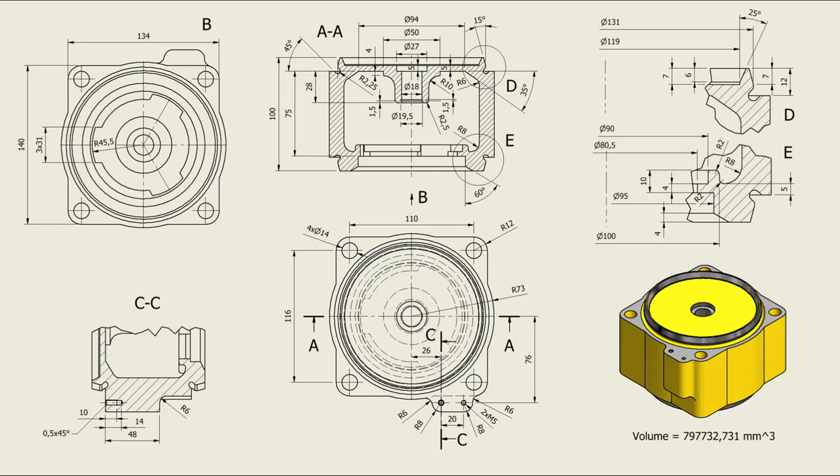Hi my friends, today we model this part, which is the pressure relay body.

The drawing is here with all dimensions. You see details D here, E here. I work hard to create these drawings, but how could I transfer information to you without drawings, my friends?

Let's start. The first sketch will be this pseudo-rectangular contour with dimensions 140, 134, a radius of 73 to this and this arcs, and the height of 75.

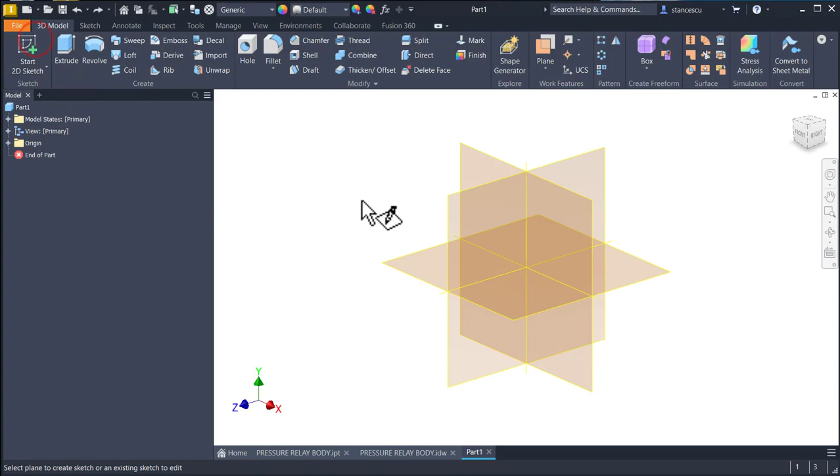Okay, new standard millimeters IPT. Start 2D sketch. This plane XZ to the right,

and we create that rectangle with dimensions 134 by 140.

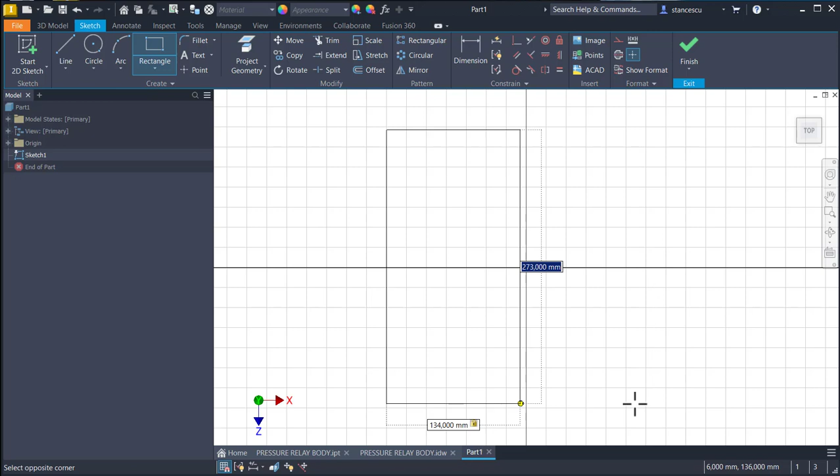We place it somewhere here, and we apply vertical, horizontal constraints,

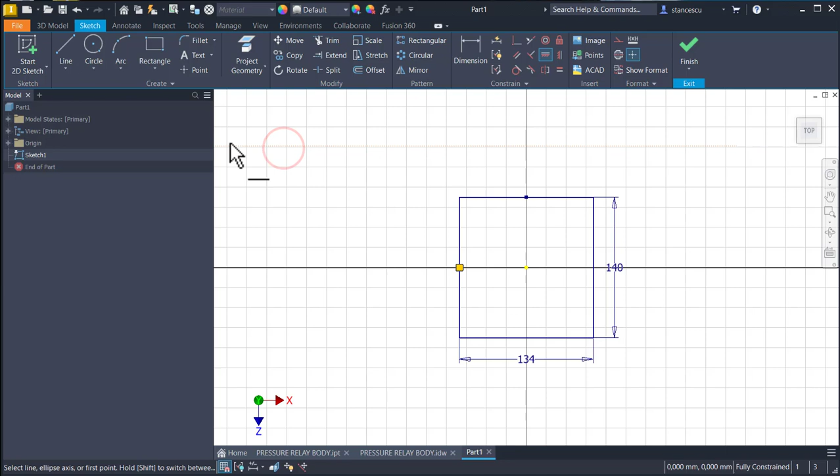then a circle with a radius, a circle with the center in the center point and with the radius of 73.

Now we have a combination of lines here, a lot, so that we trim each of that lines and arcs. You can use another procedure, of course.

These 2 points are not important now, and we have 10 dimensions needed. This is one alignment. This is also aligned, and aligned. Now we have 6 dimensions needed.

Then we create equal arcs, equal with the same radius, of course. And now we have only 3 dimensions needed.

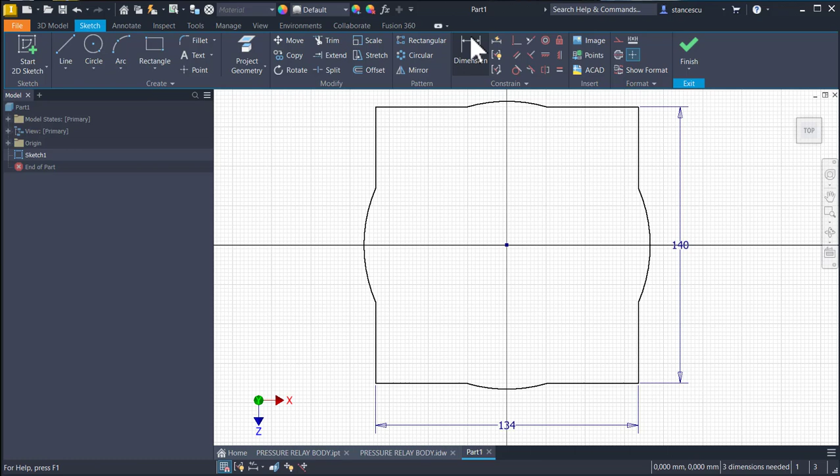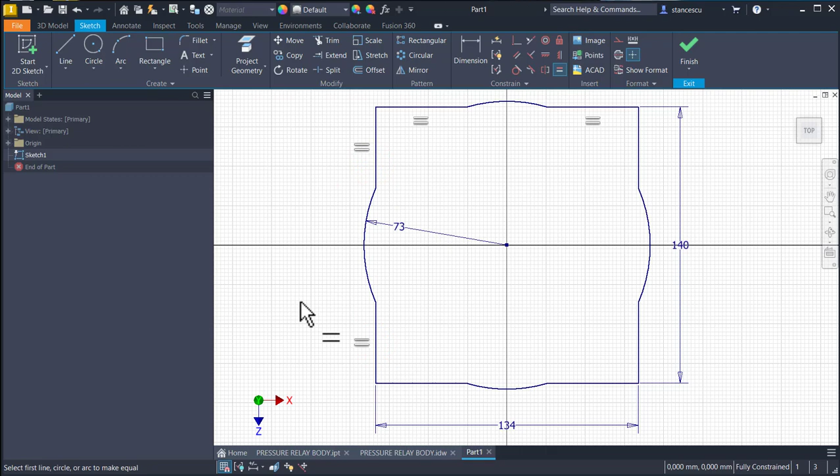This is 73, and we make equal this with this. This means we have a center on the horizontal, and this with this equal up. Fully constrained sketch, finish sketch,

and extrude. 75 symmetrical, 75.

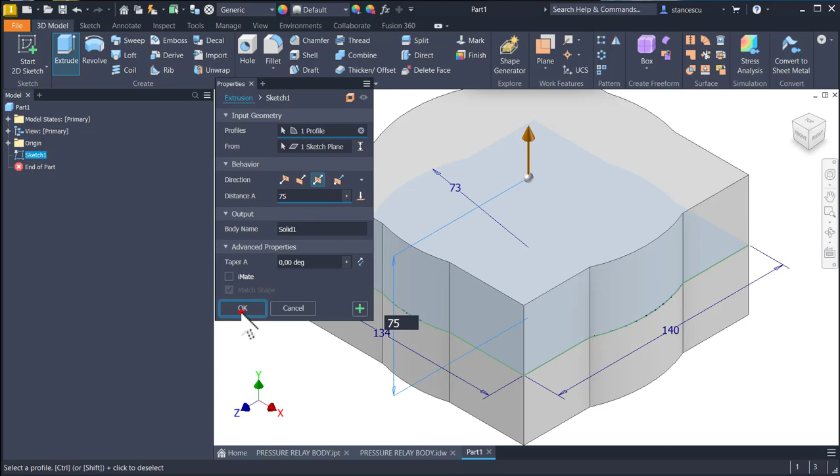Okay, now we take a look at the drawing and we see radius 12. This is a fillet of 12 and also the other corners.

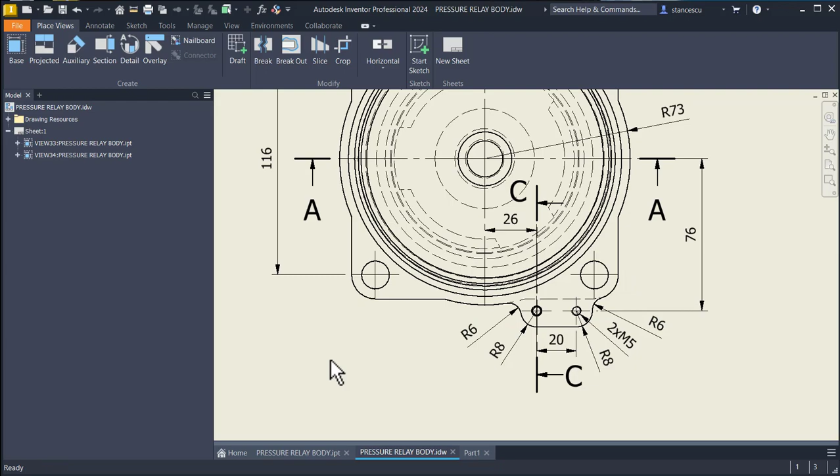Okay, then we create this extension with dimensions here 26, 20, 76 for these centers, radius 8 on the left and right, radius 6 at the connection with the previous pseudo-rectangular body. The depth or the length is 48.

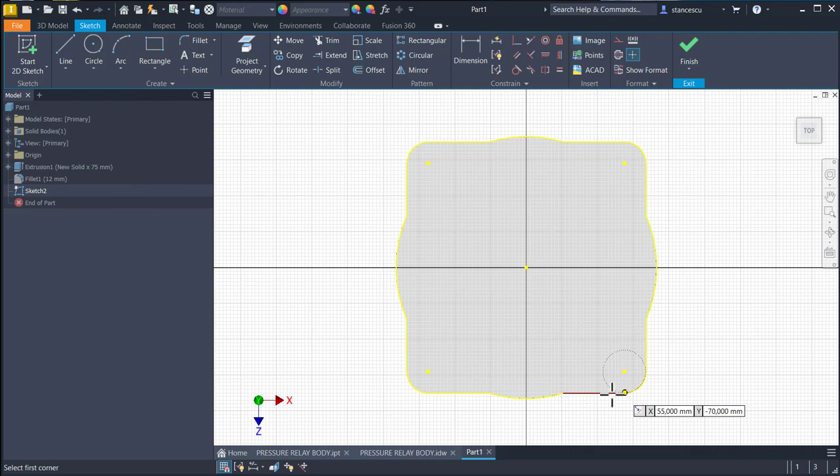We use this face. We create a rectangle based on this line, projected line.

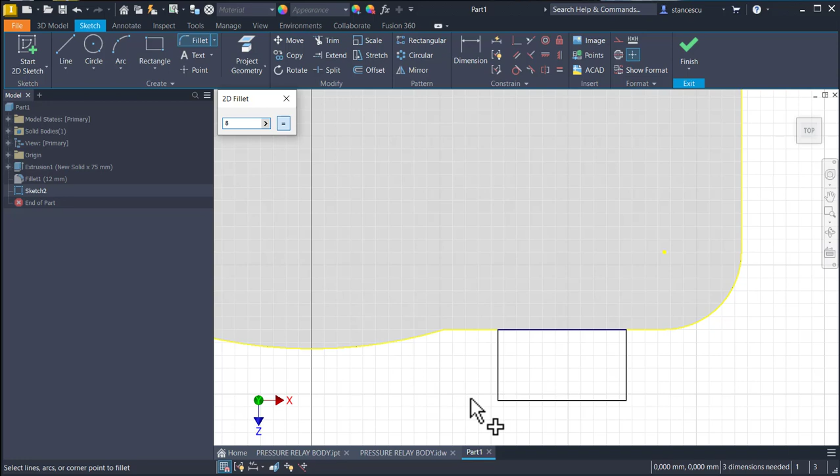We apply fillets of 8 to have centers, you see, 8. To this corner and this corner.

Then dimensions 26 and 20. 26 is this.

And 20 is between the centers or arcs. The other distance is from the center to the center point on vertical, 76.

Good. We have here a small corner. Let's project this arc. Project, and we apply split. Split and split. Why? Because I want to make this construction.

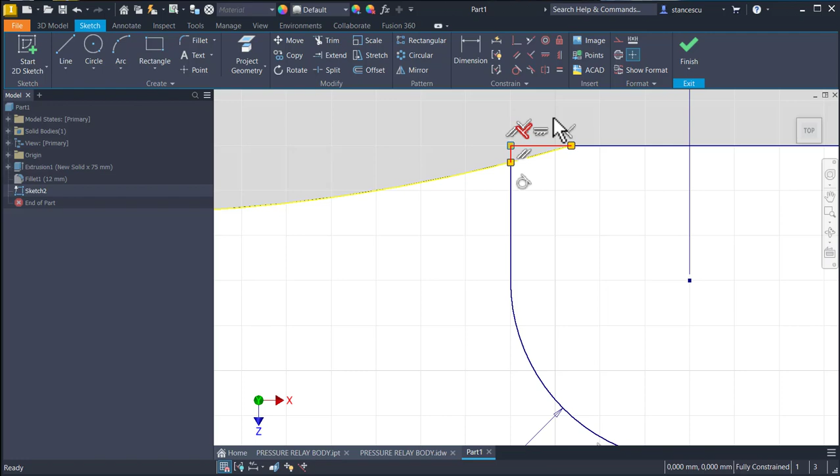Now finish sketch, because we have a fully constrained sketch, and extrude this close contour on this direction, and the depth or the height is 48.

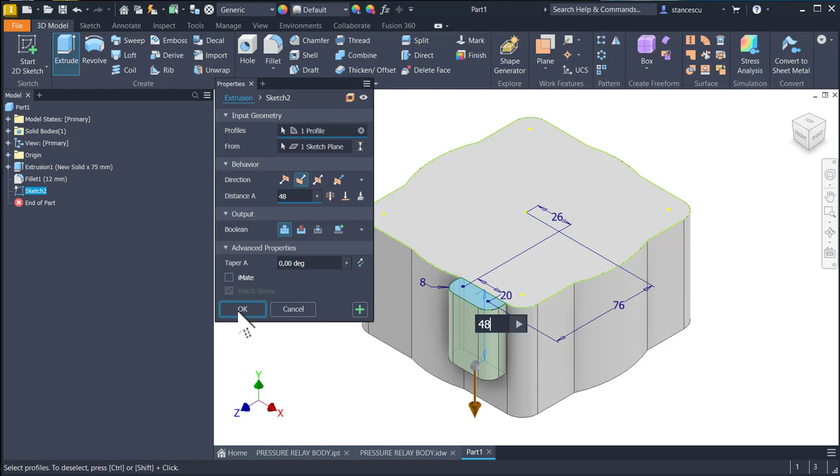Okay, then we see that there are fillets, this one and this two. Good.

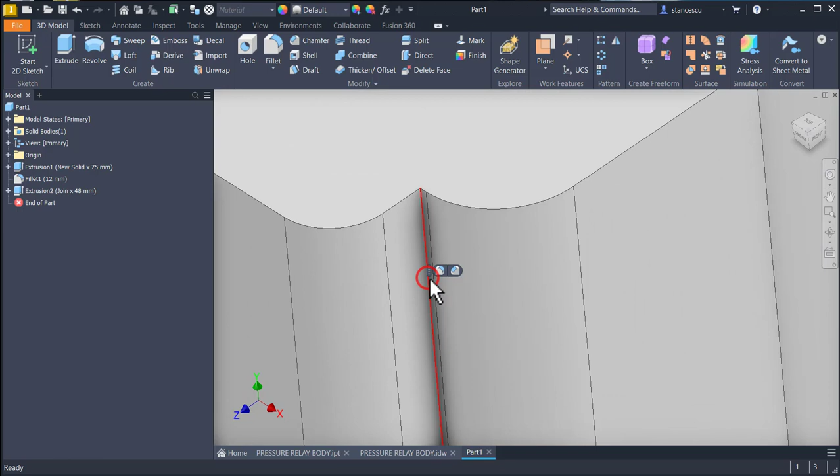We select this corner to apply radius 6, and also this corner with 6. Then another fillet to this bottom edge. Okay.

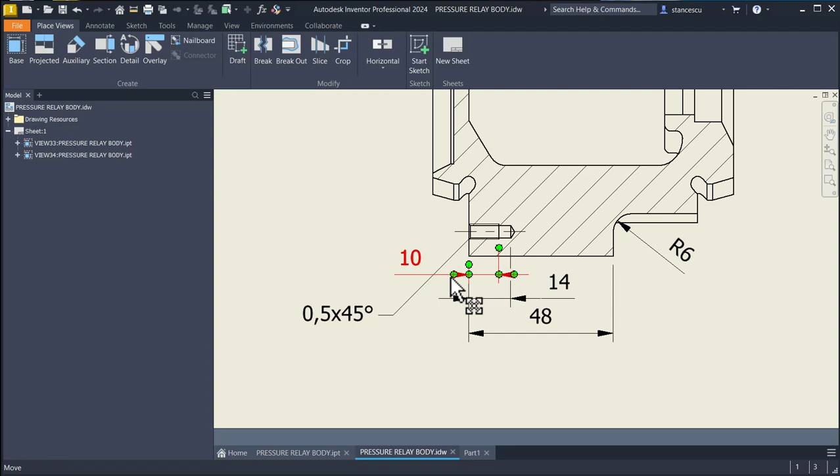To finish this feature, we take a look here and we see that there are two threaded holes with 10 millimeters for the thread, 14 for the depth, and metric 5.

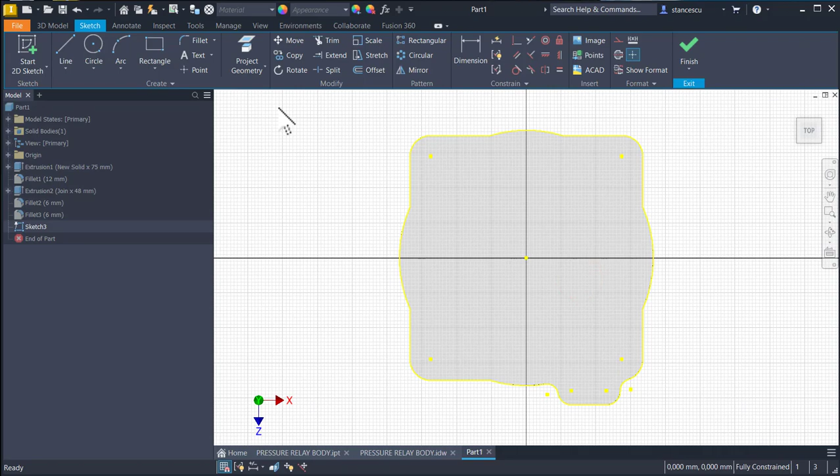Let's place these two small holes. Now we have centers and we apply hole. What kind of hole? They are placed here and there.

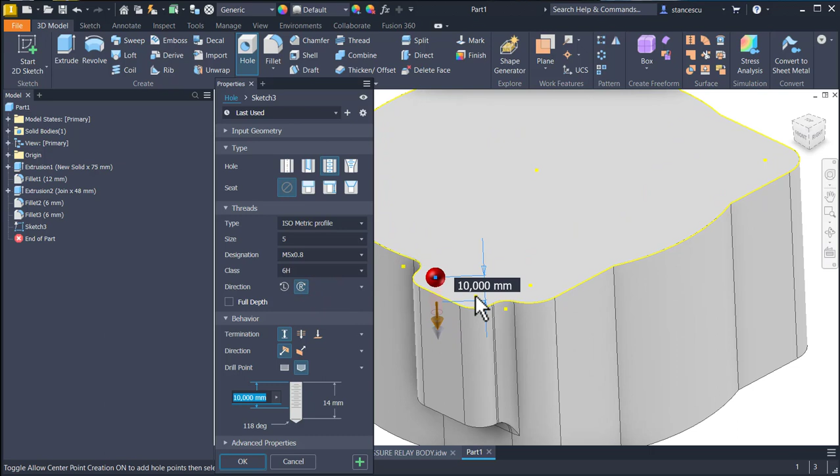Oh, they are already selected, but let me select also this point. Yes, 10, 14, metric 5, normal pitch, not full depth because there is a difference between them.

We also see here 0.5, 45 as a chamfer, edge, chamfer 0.5 to both. Okay.

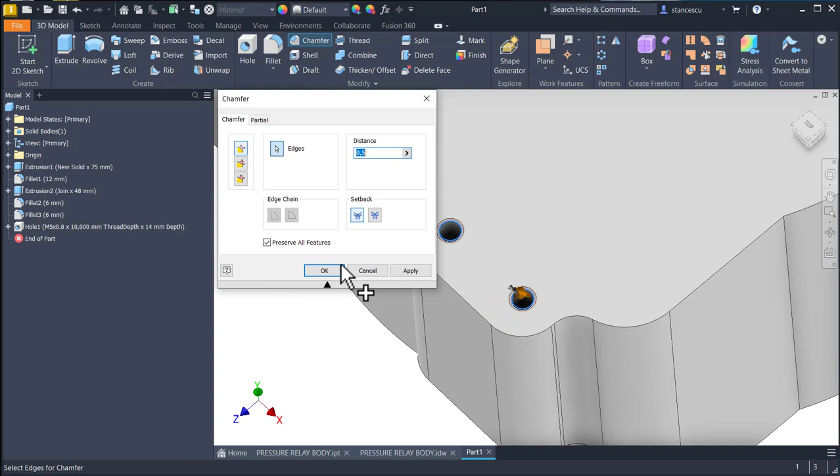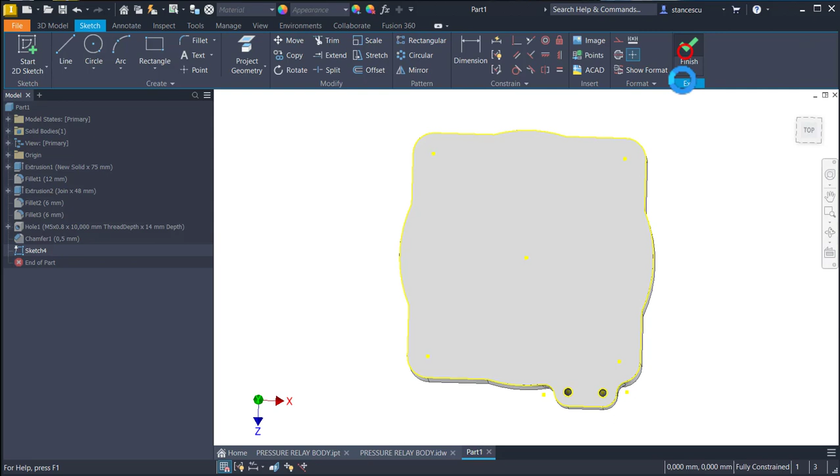Then also to finish with the small problems, we see 4 holes of 14. I create another sketch, go back and apply hole on this 4, 1, 2, 3, 4 points without thread through

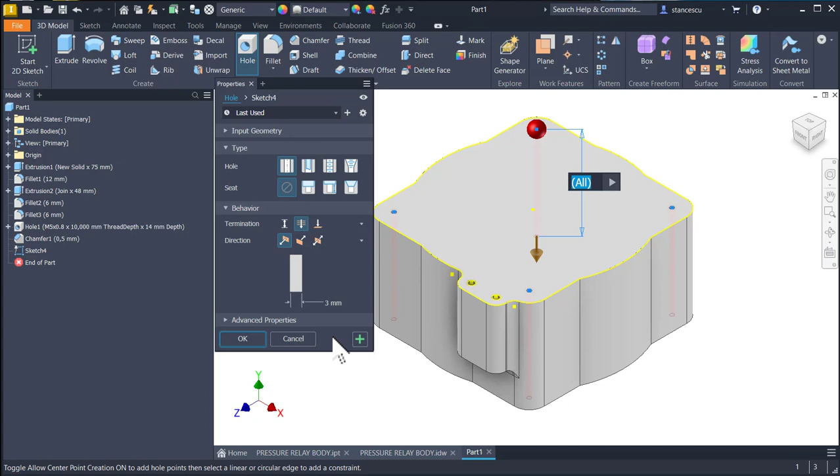Yes. Now we create this revolving feature with dimensions of 15 degrees, 12, 7, and diameter of 131. Only external, yes, without this cut, only external.

The plane is XY. F7, and we draw a line from this center to the right, up, back, and close.

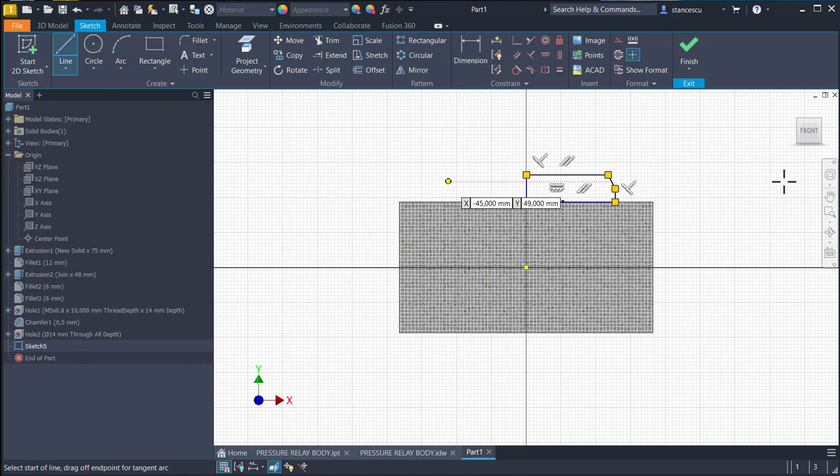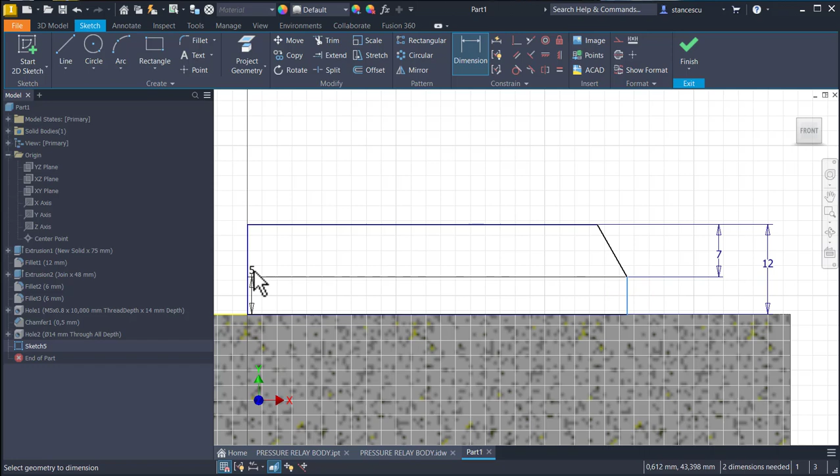Then dimensions 12, 7, 131, but let me change this to center line, and now 131, 131, and the angle of 15.

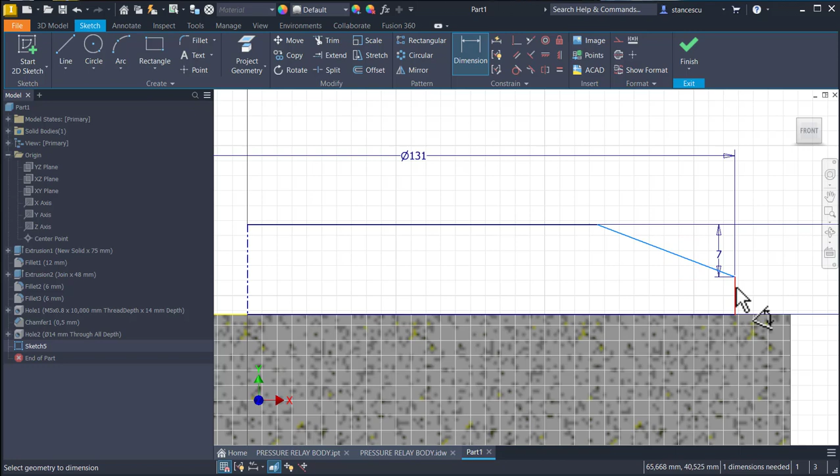Finish sketch. Revolve. Okay.

Now if you take a look to this external, they are the same. If we have no dimensions here, this is what we understand. The external shape from here is the same with this.

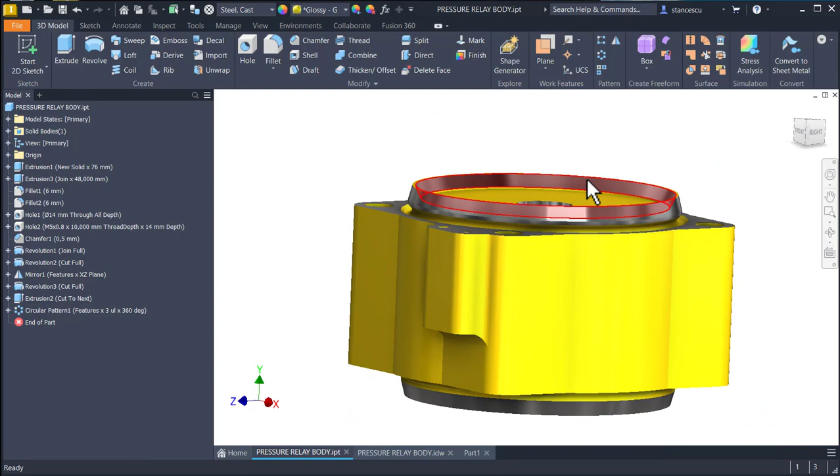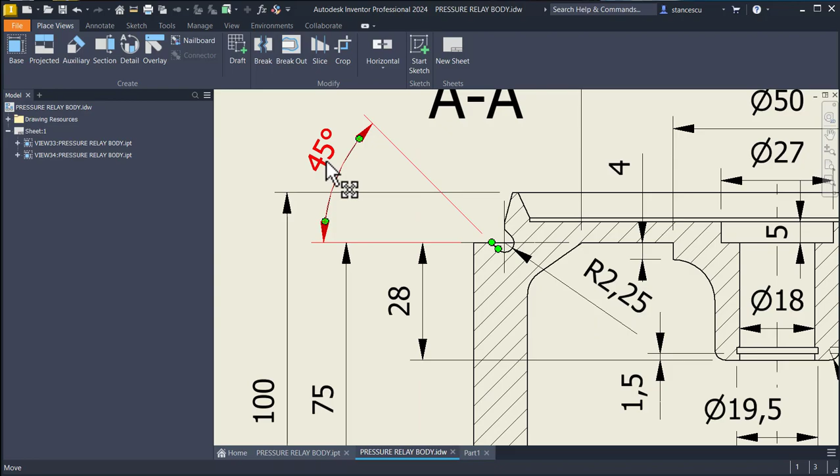I'll create this cut firstly, then I mirror this external feature. What about that cut? The center of this radius is in this point, and the value is 2.25 and 45 degrees.

Again, XY plane, F7, I project 1, 2 lines. They are construction lines.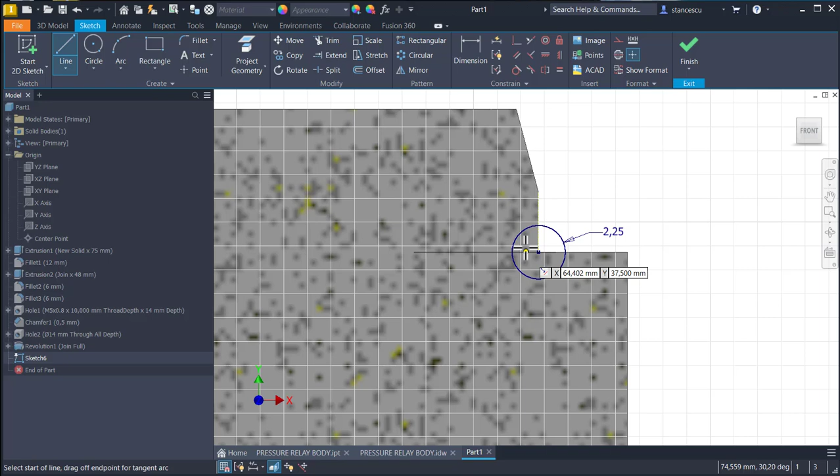Circle with the radius 2.25. Then 2 tangents. Keep pressed the left button somewhere on the circumference and go to somewhere.

It is tangent. Restart. Keep pressed the button and see that we can draw now a parallel because Inventor knows what I did. You see? Parallel with the other one.

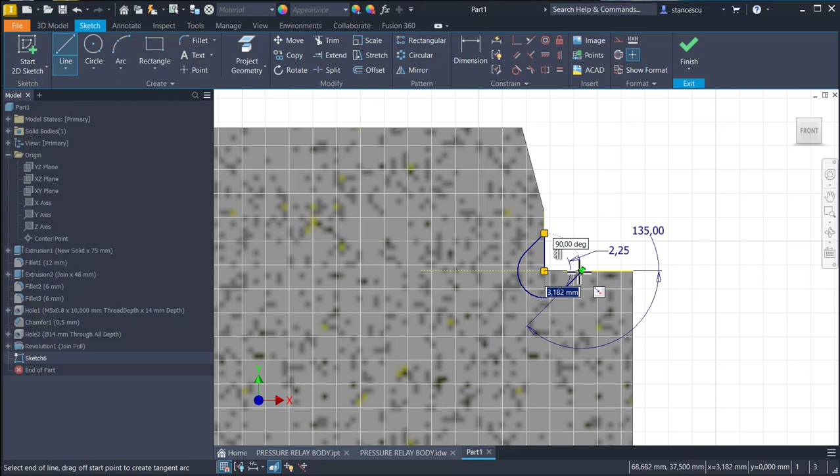45 is the angle here, and now trim this end line, trim this and these 2 arcs. I draw 2 lines, 1 and 2 to have a close contour.

Finish sketch, revolve. This is already selected, and now the axis, which is Y. The axis Y. Cut, not join.

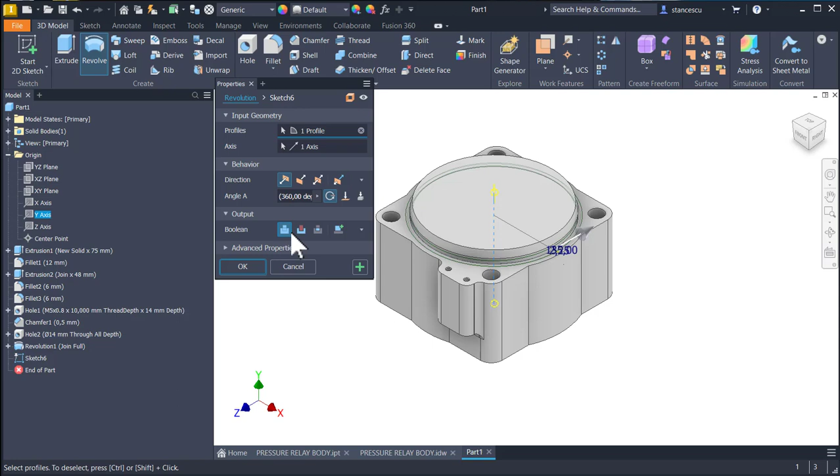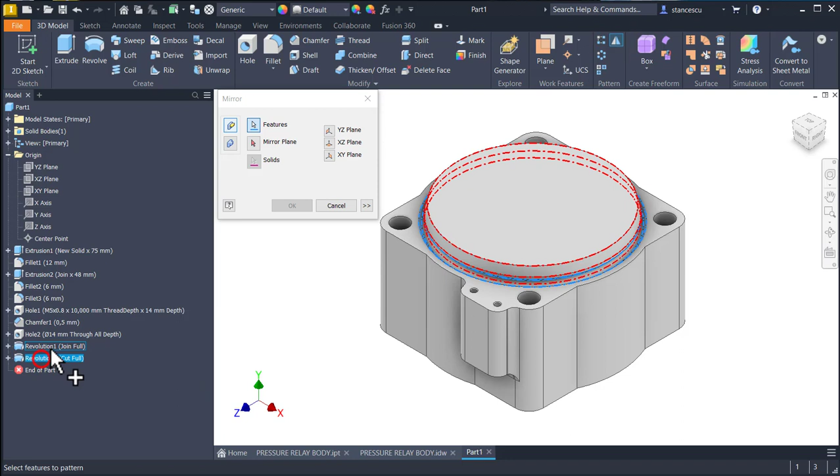You see, this is the new feature. Now, as I said, I apply mirror of 1, 2 features about this midplane. Okay, we have the same picture on the bottom.

Next is the internal volume, which has dimensions from here. Look at my trajectory. Yes, here. All of this is hollow.

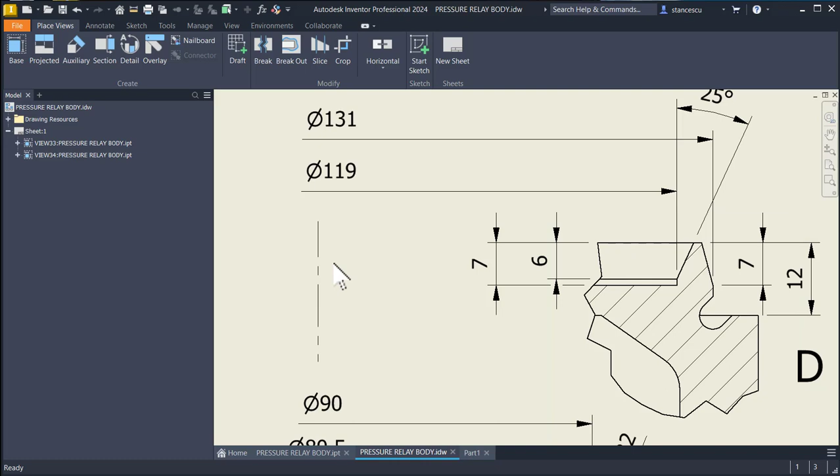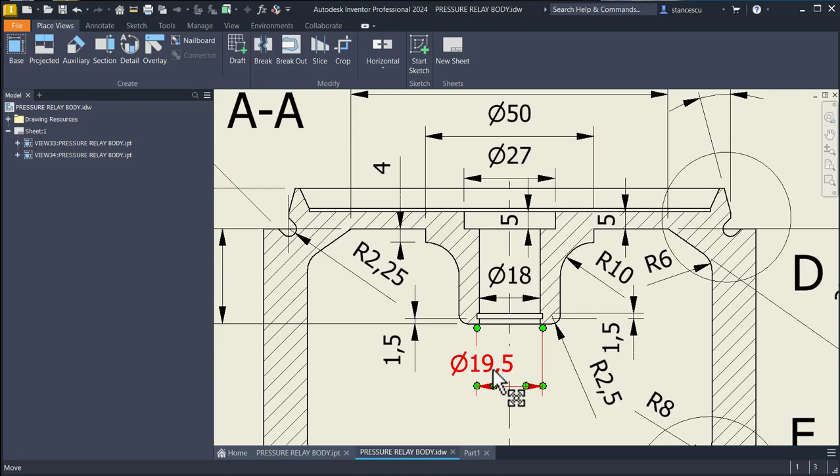Good. And where are dimensions? Dimensions are also on these 2 details. 119, 6 is this, 7 like outside is all the depths, and then here another revolving contour, 5 with 27, 18. This is a small cut of 1.5 distance and width, diameter of 19.5,

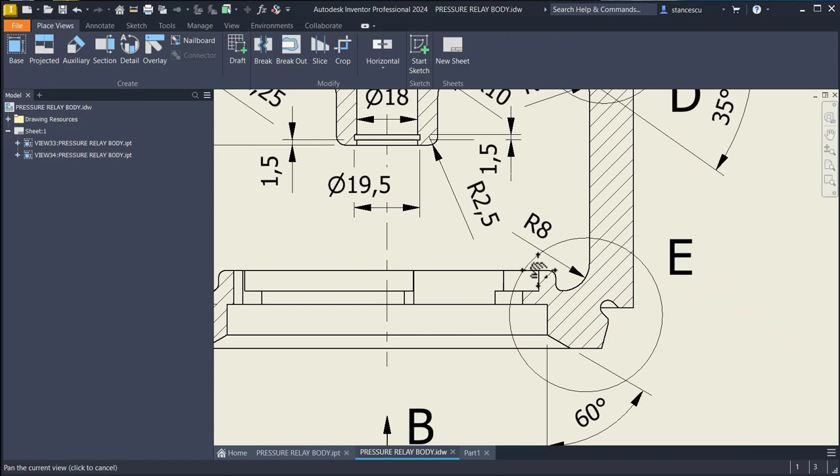radius 10, this is 2.5, then 4 millimeters, then a diameter of 94, an angle of 35 degrees, radius 6, radius 8. We go to the detail and we have radius 8, radius 2, radius 2, 90, and the other dimensions you have here all the data, and 60 degrees here.

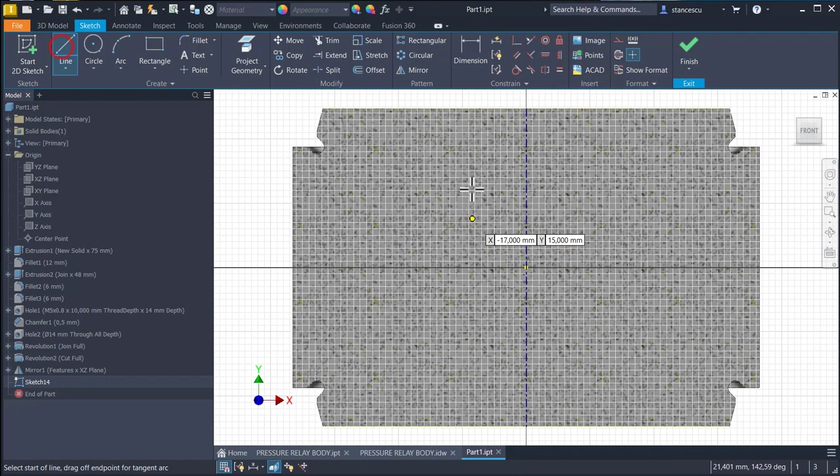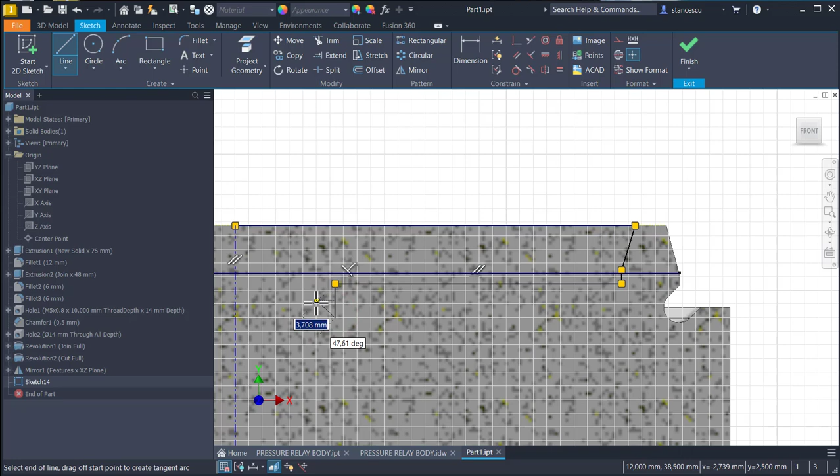Okay, XY plane, sketch, F7, home, project this line and this line, connect their centers with a center line, make these two as construction and the axis as center line. Then we draw lines. The first is this one, then another one sloped to somewhere here, then vertical, then to the left, down, left again, down here to the right.

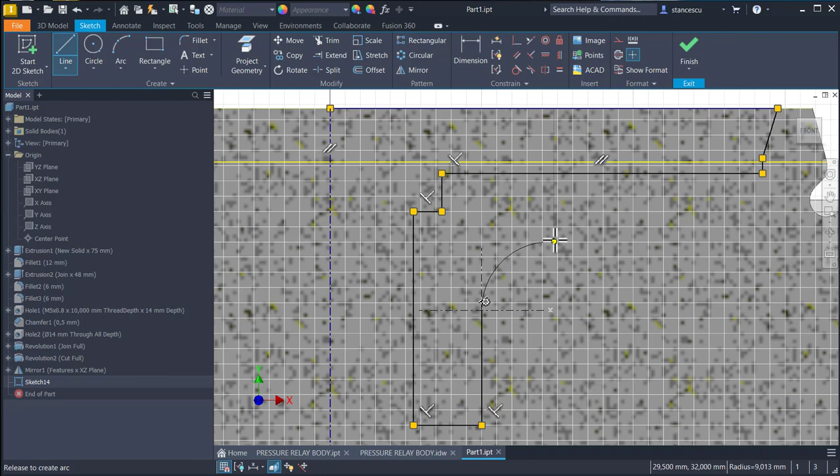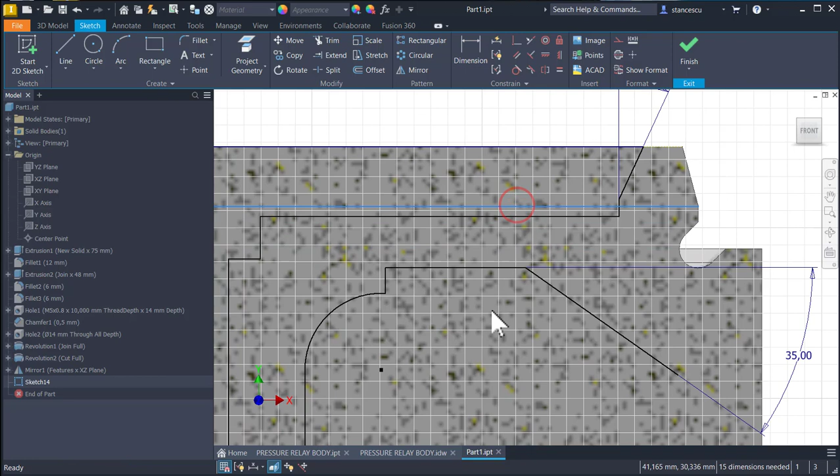I keep pressed the left button and I draw an arc up, right, and somewhere here. We start with angles. This is 25. This was not vertical, we make it vertical. Good. Then the other angle is 35. I erase this line, we don't need it, and we place dimensions. This is radius 10.

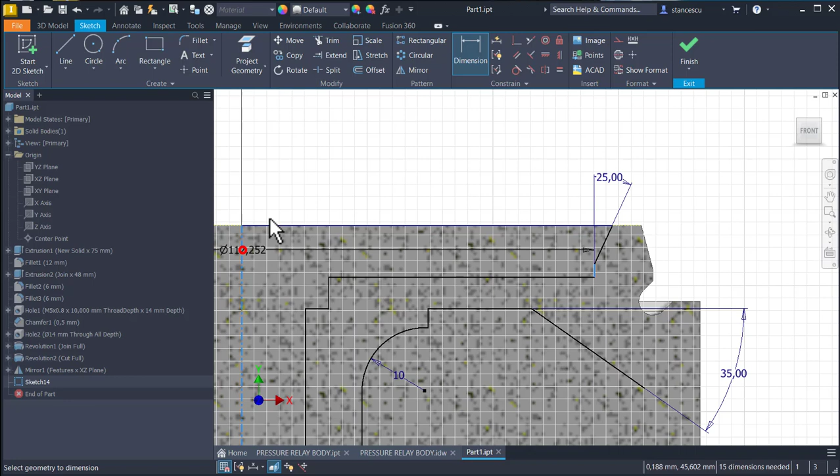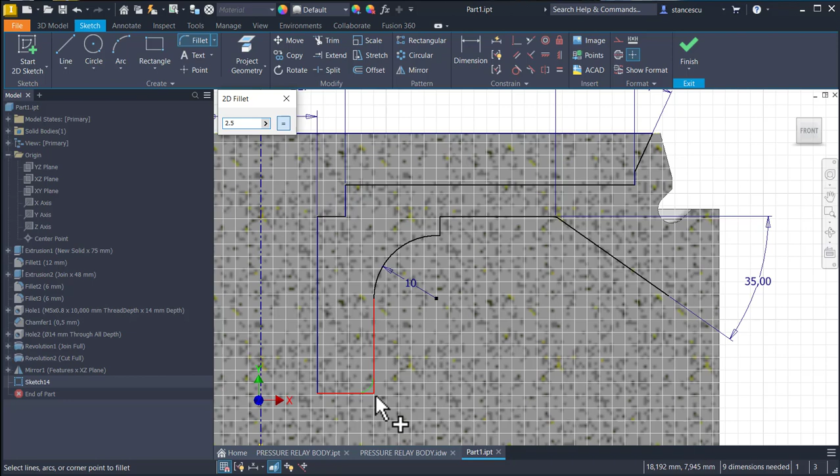This is a diameter of 119. 119. This is 94. This is 27. And this 18. I apply fillet of 2.5 at this corner and a diameter of 30. This is 28, right, 28.

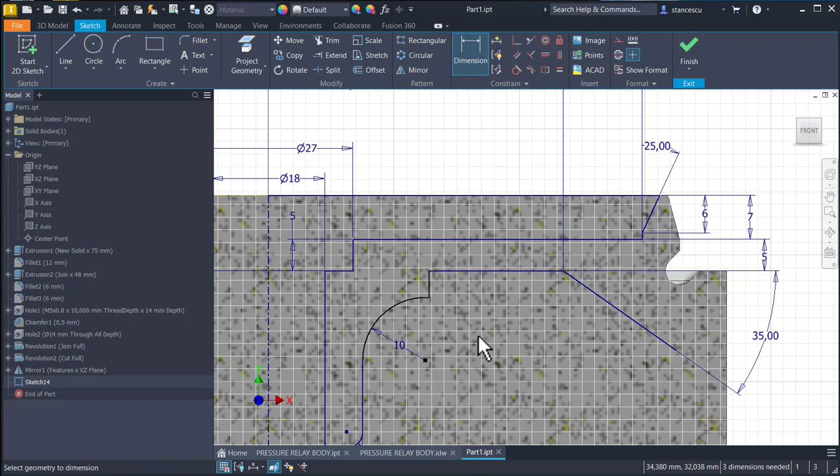This is 6, 7, 5 is here, and also 5 is here. Two dimensions from the drawing. This is 4 and what else? This is not defined. Okay, we go further.

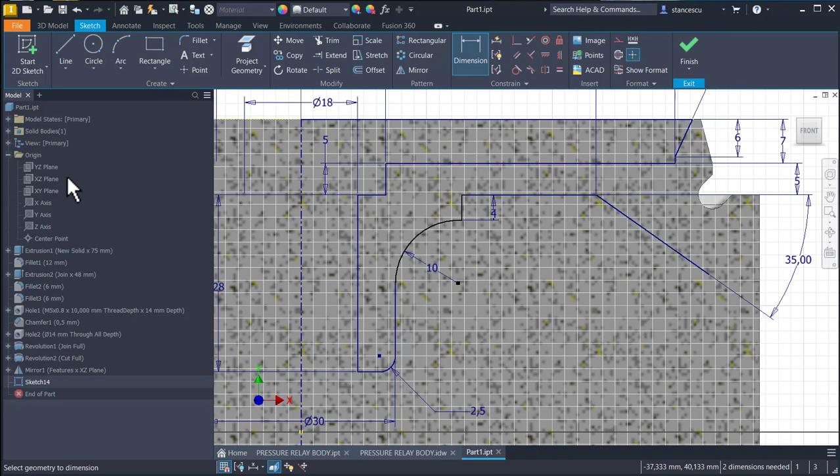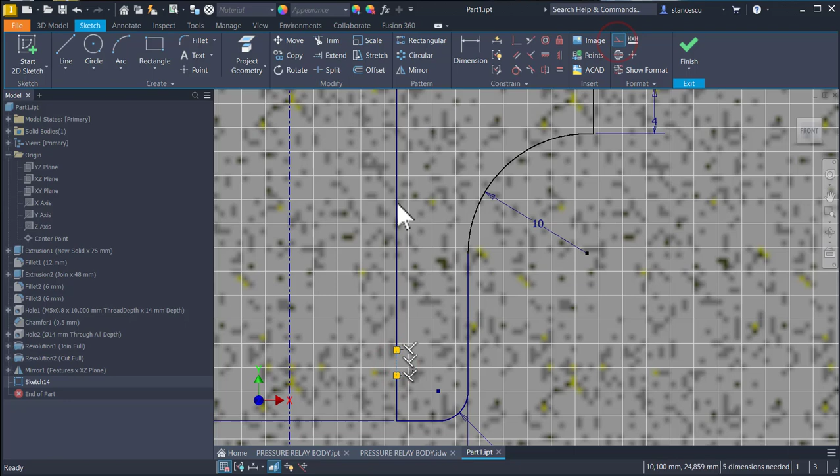Further is to create that small cut here with dimensions, but let me split this line to create a segment which must be construction. Dimensions are 1.5 and 1.5. Diameter is 19.5.

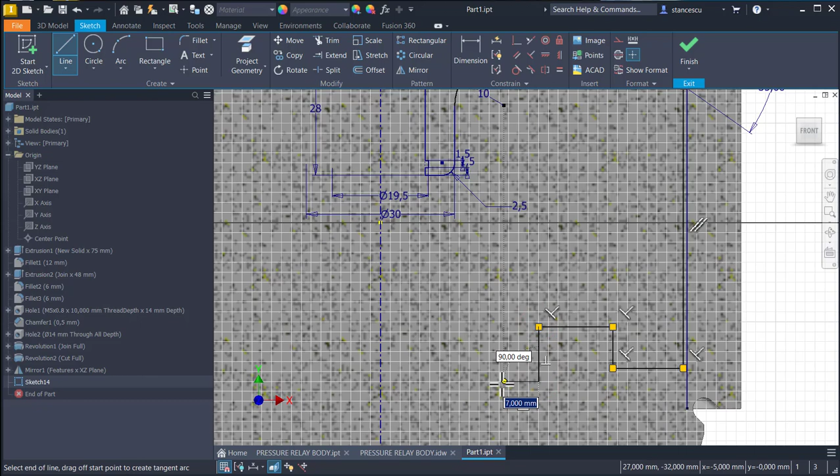Now I make smaller this line and I continue from that point down to somewhere here, horizontal, vertical, left, down, left, down. I don't want to have any connection with lines here. I delete this. Now I can move. Yes, line from this point, horizontal again. This is an important line there. I eliminate it and I can move this.

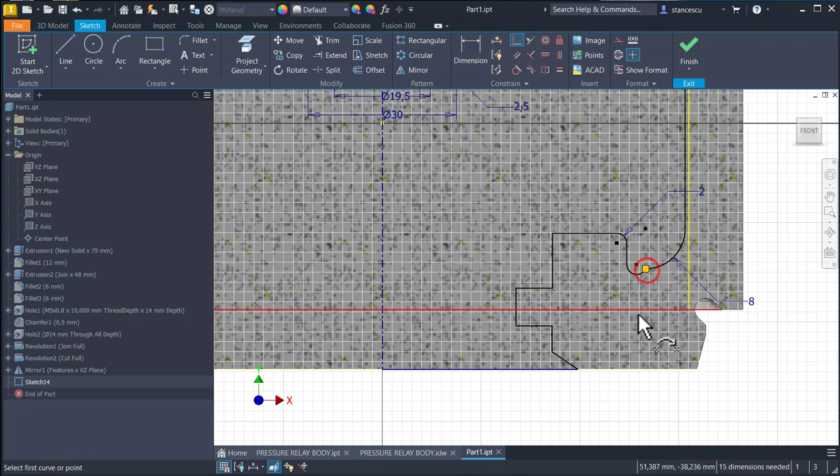Vertical and sloped. Now I close this contour. Fillet 2 in this corner, of 2 and this corner. Now I apply fillet 8. I am curious about this line. This is 12. Well, I apply fillet of 8 from the drawing at this corner. Then I eliminate this segment and I put together these 2 points. They must be tangent. Now they are.

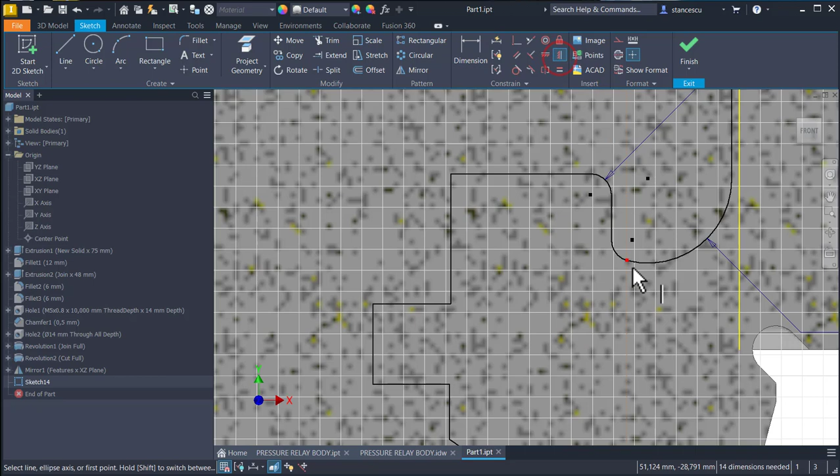Good. This point has a dimension of this connection point, but I want it to be on the same vertical. This point to be on the same vertical with this. Now I place here dimension of 5. And an important dimension is this one, my friends, 75. It was placed by the designer and we have to respect it. That is this one. Yes? Dimension from this bottom with this upper line of 75.

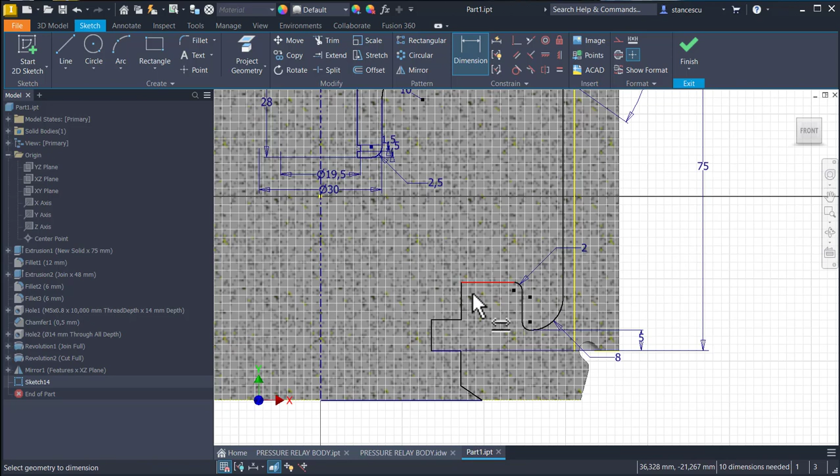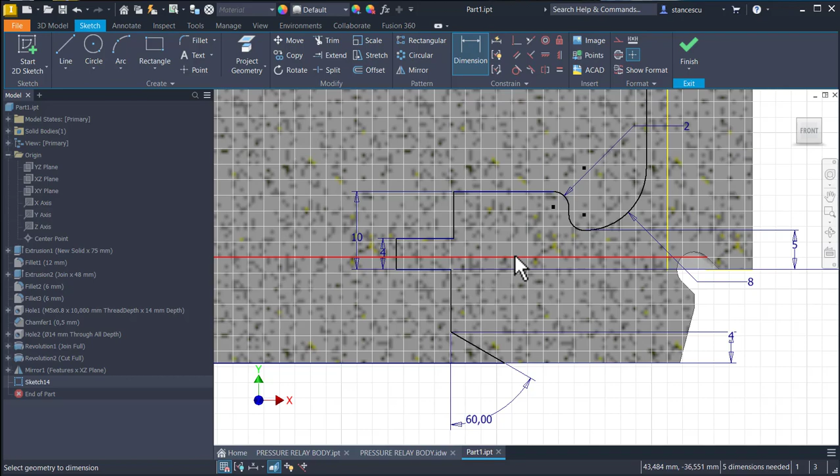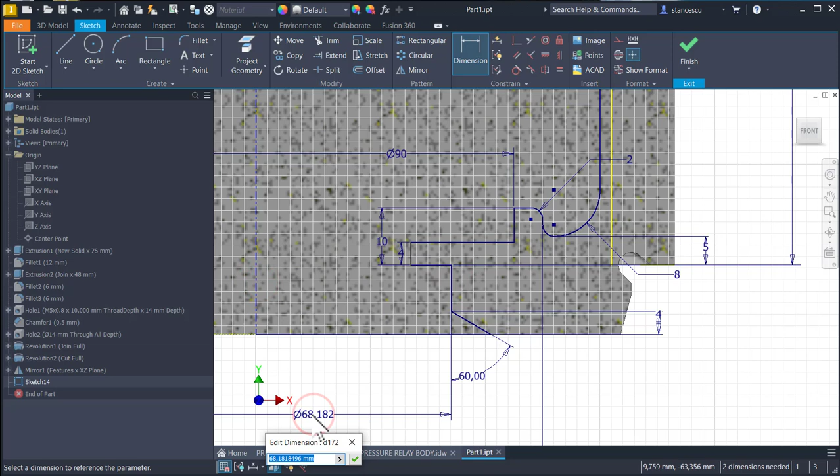Then our dimensions: angle of 60, dimension of 4 on vertical, then 10 between these two, 4 is this, and now diameters. This is 100, this small line is 100. This is 90. This from here is 95, and this is 80.5.

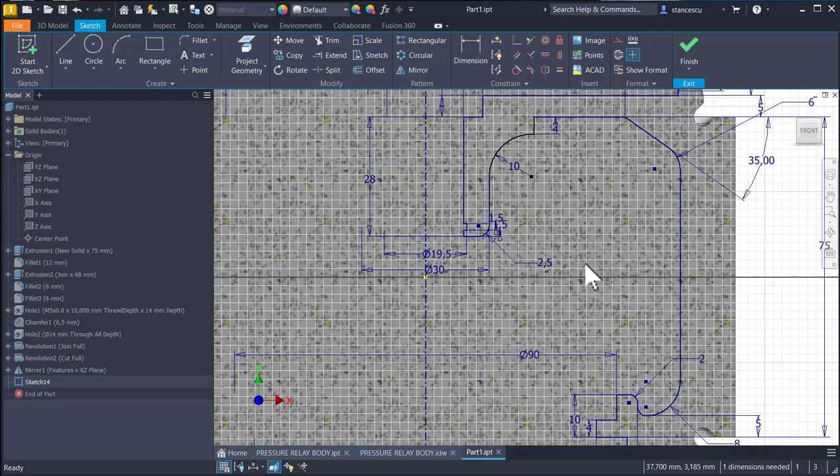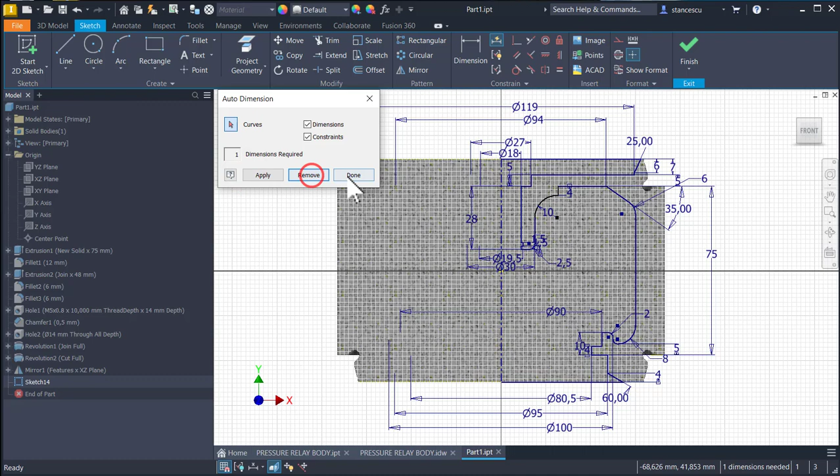Only one dimension is needed. Let me see which is that dimension. Forgotten. But before I eliminate this line, which is parallel with this, we can apply verticals very easily, and the radius 6 is here. Fillet 6 between these two, and there is a dimension which I missed. Well, let's use automatic dimensions. Apply. Oh yes, remove. This diameter is missing. This diameter, which is 50.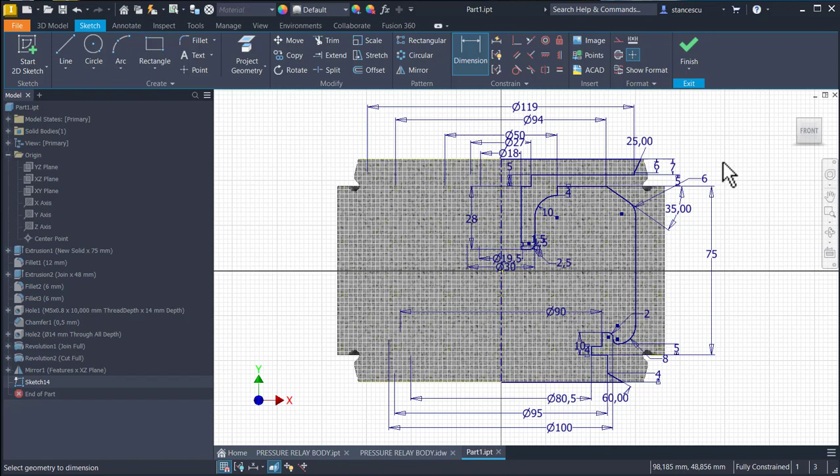Okay, there are many lines and we are excused. Finish sketch, revolve. You see, automatically we have this hollow internal volume. Okay, what is next? Next is this cut in 3 instances, 31 with radius 45.5. You see this here. Yes. Okay, let's see how to do this.

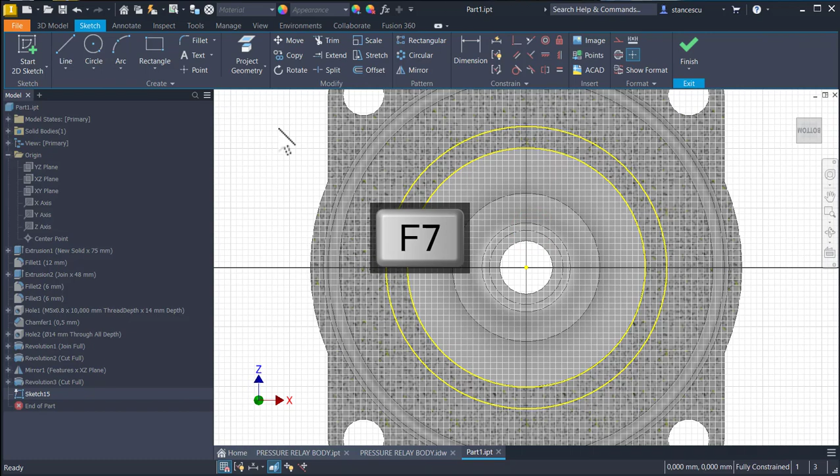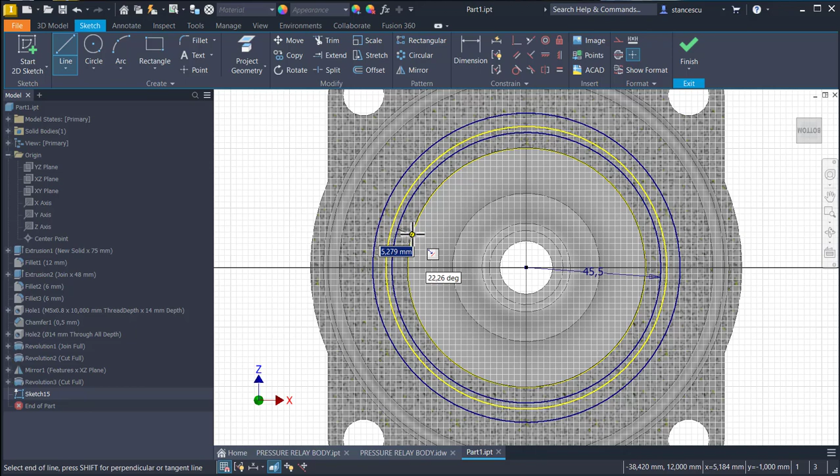We go to this face with a new sketch, F7, and we draw a circle with the radius of 45.5, and 2 lines. One horizontal line. This is not horizontal. Now it is. And another one, I place it on purpose to be asymmetrical because I make them equal, this equal to this. And now they are symmetrical about this axis. You see, they are symmetrical. Yes.

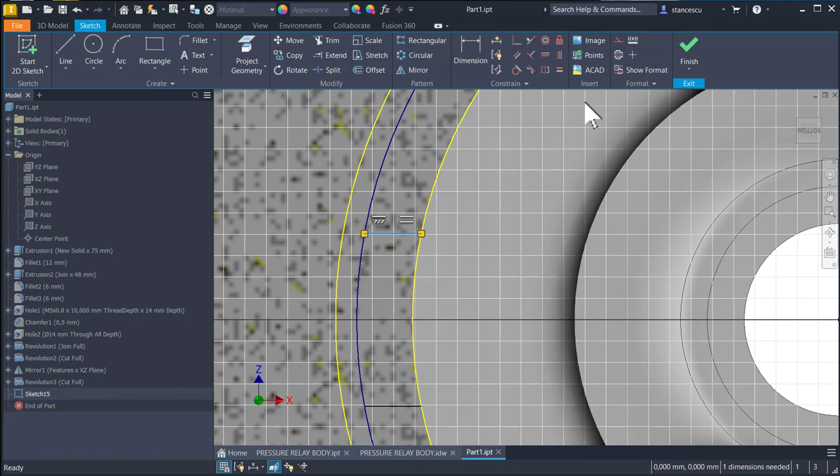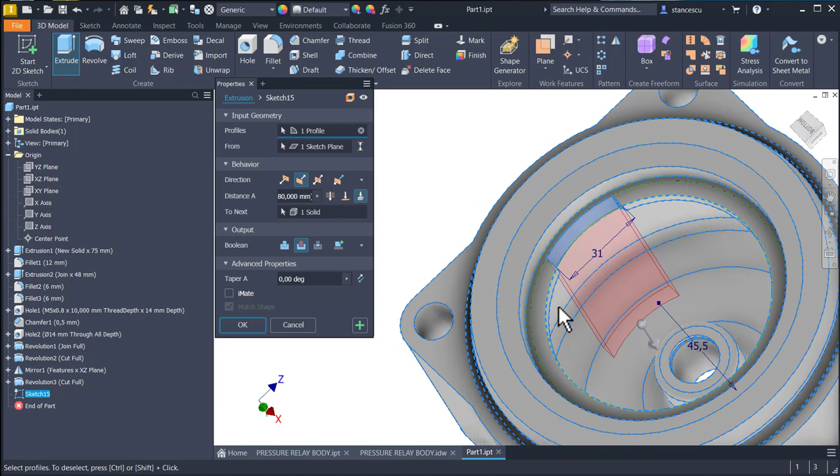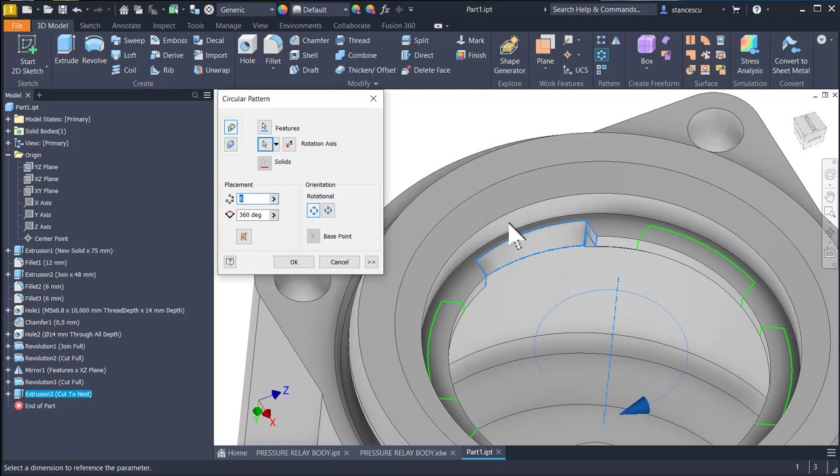Dimension is 31. Finish sketch. Extrude. What to extrude? This. To. You see, we can go through the part. We go to the part, to the first face of the part. Okay. Then I go back. Then circular pattern of the last feature about this axis. Not 6 but 3. Okay.

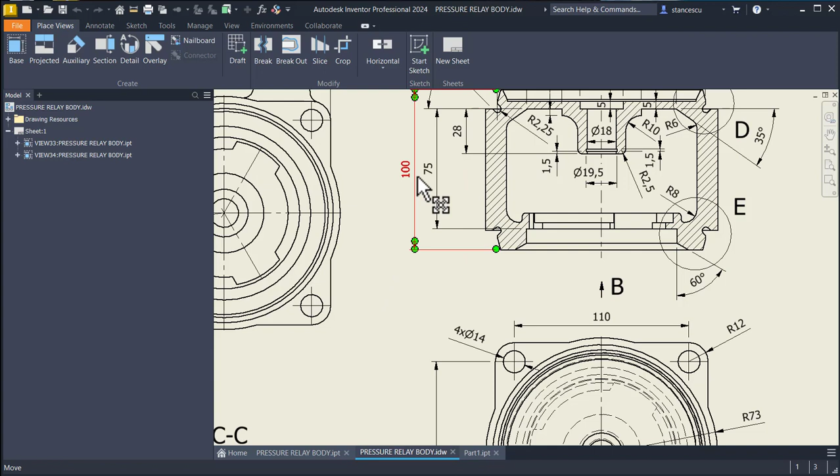Now I see here extrusion on 75 millimeters, but here must be 76. You see the drawing. Indeed, we have a 75 dimension, but that is for this small line. This face is longer, this edge is longer than 75. Yes, because 12 is this distance, and we have to subtract twice 12 from 100, and this means 76. There is no dimension here. The designer didn't place here a dimension of 75, because this is 76.

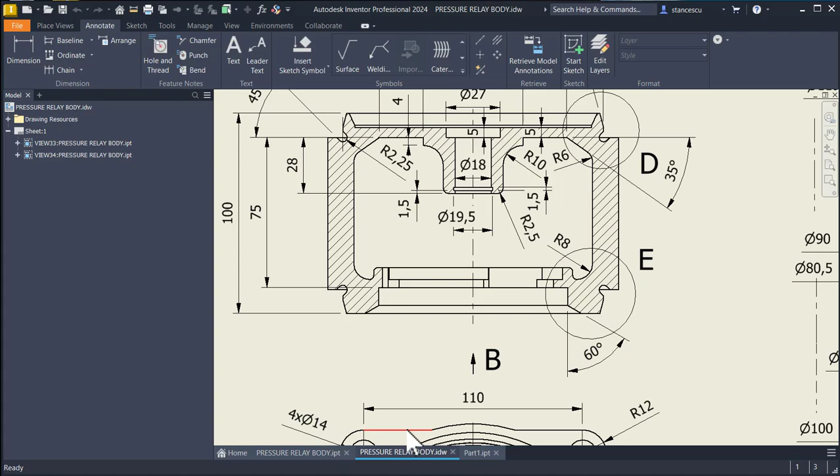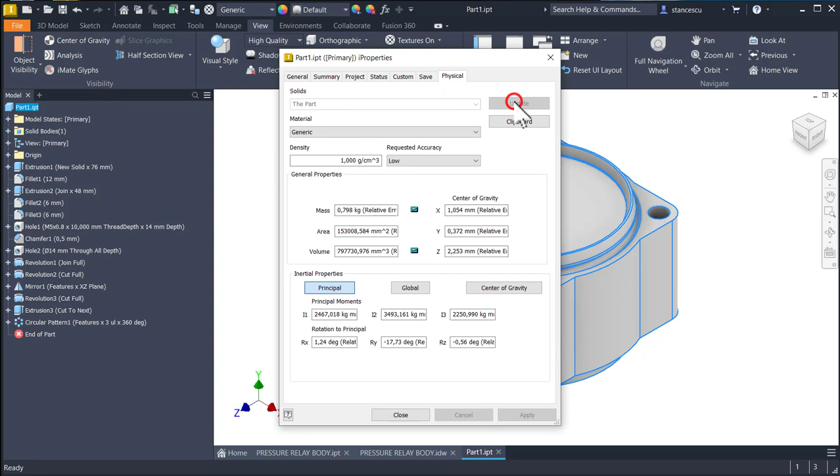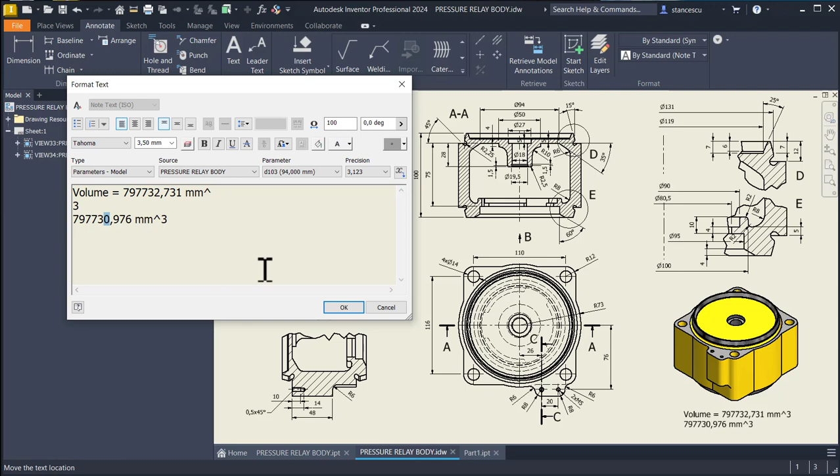This means that we have to modify the extrusion, double click, and apply 76. Okay, let's see what about the volume. Properties, physical, update, copy, close, drawing, double click, paste. Oh, there is a very small difference at the 6th decimal. This is nothing. We eliminate the former value to have what we did. Yes.

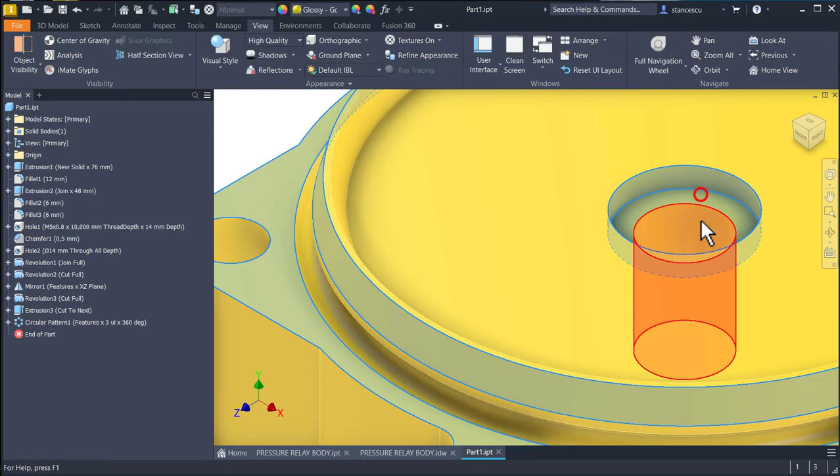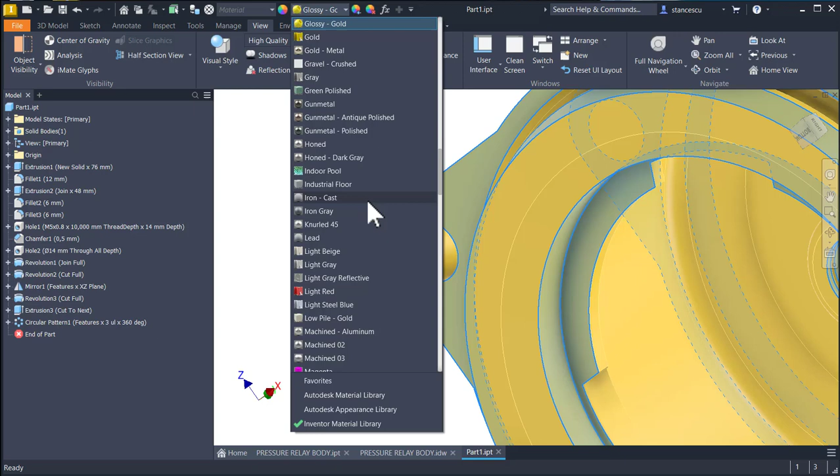Now we apply material, which is steel cast, color, which is glossy gold, and we apply some aspects to some features. What aspect? The aspect is steel polished. I keep pressed the left button to select these faces, and now I apply steel carbon, steel polished, excuse me.